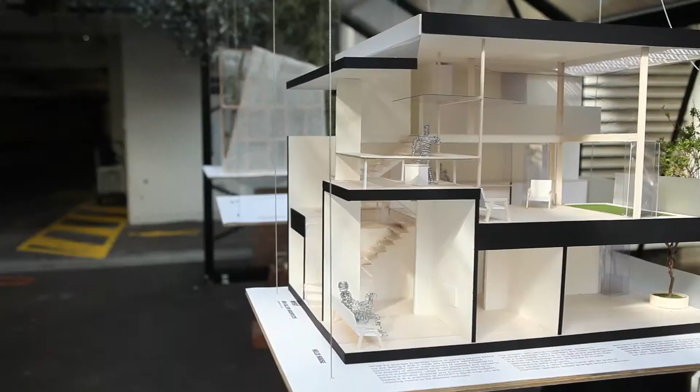It was interesting to hear the Edition Office guys saying how much they use models, because we unfortunately don't use them anywhere near as much as I'd like and don't get the chance to. So when the opportunity came here, I really jumped at the chance to get in there and spend a lot of time making a model myself and get these guys to do all the billable work for a couple of weeks, which was very handy.

First, I thought I'd start by talking about our clients in this brief, the family of four. Most of us here are somehow related to a family of four, whether we're from one, in one, or maybe one day we'll have one. Myself, I'm currently in a family of four. I've got two little girls, aged 4 and 7, Evie and Ruby, and all of the issues in this brief resonate with me. Even looking at our current clients, we've actually got 17 families of four that we've dealt with over the last 3 years.

So this is a really prominent clientele for us, and the issues they're dealing with is what we're engaging with all the time. What's been encouraging is the brief for the family of four has really developed in the last 10 years, and we're finding they're much more interested in sustainability. They want a compact house. They don't want the obese 240 square metre house we're seeing in much of Australia at the moment, which is the average Australian house size. We are finding people who want more compact, clever, adaptable flexibility in a house between 160, 180, maybe 200 square metres. That's really encouraging for us.

They're wanting to engage with the environment, to have sun, breezes, views to treetops and sky, wanting a naturally comfortable home. Most importantly, what we're finding is that they're all yearning for more connectedness with each other, and that's a huge part of sustainability from our point of view, the social sustainability and having houses that bring people together, not just about the physical. It's actually about creating relationships. So that's the key thing for us in this project, the connectedness.

So here we are on the site. Obviously it's a tiny footprint surrounded by tall buildings on 3 sides, but blessed with a sunny northerly orientation on one side. The main constraint is the size, 80 odd square metres, which requires people to be stacked vertically. The biggest problem I find with a vertical building is it separates people and distances them from each other. In light of the fact that our clients are telling us they want to be connected, that becomes the biggest challenge for us to address in this brief: how to have people vertical but still together.

So we propose the Helix house, where rather than having levels purely stacked upon each other in a tower format, we've got multiple split levels arranged in a spiral shape, where people can be in different spaces but still have a relationship with each other. Meanwhile, we're bringing the environment in amongst these people, the sun, the breezes, the sky, the landscape, so they're all immersed within their natural environment, living hopefully more in contact with a nature way of life.

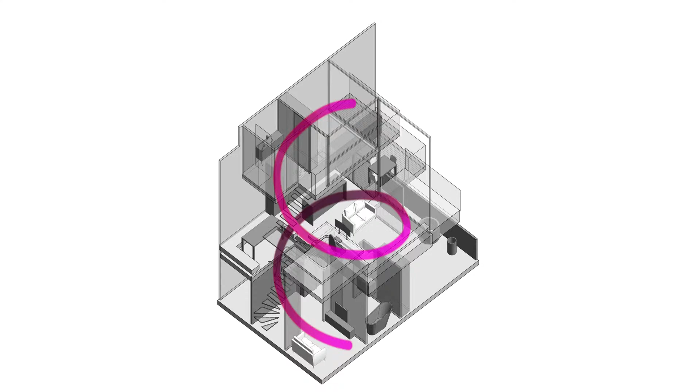So here we see the helical arrangement of spaces. Rather than bringing things in off the boundary and having a tall tower, we've pushed the walls to all the boundaries and kept it quite a squat shape. It's basically a cube, only about 7 or 8 metres high, pretty similar to what the width is. So one big volume and then separate levels helically arranged within that, borrowing from Raumplan concepts of flexible open spaces that all can flow into each other.

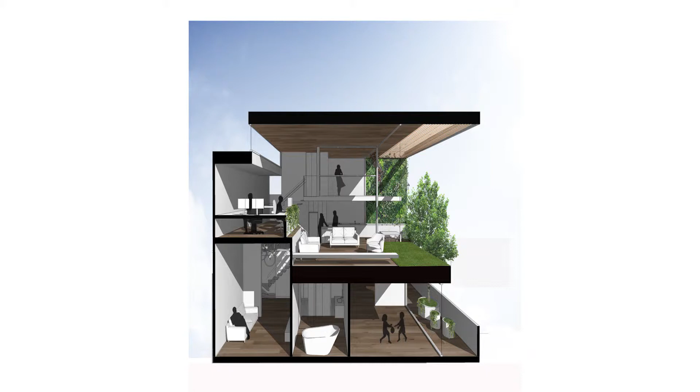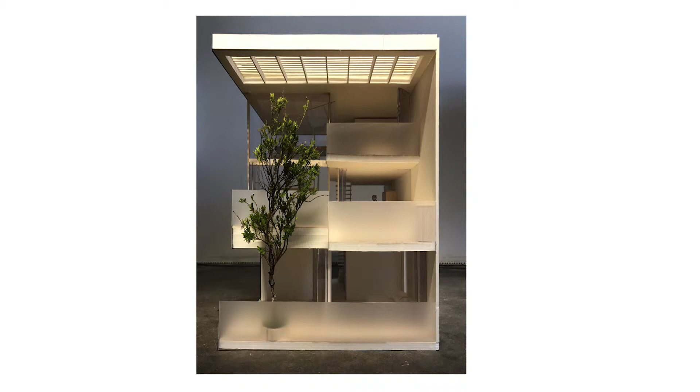And here we see it's all about bringing the light in from the north, having cascading terraces of garden over 4 levels on the north side, and then bringing that into the house and taking people out to the light. This is the north facade, with the 4 levels all pushed in and out to share light from up high down into the lower levels, with greenery growing up from below and flowing down from above.

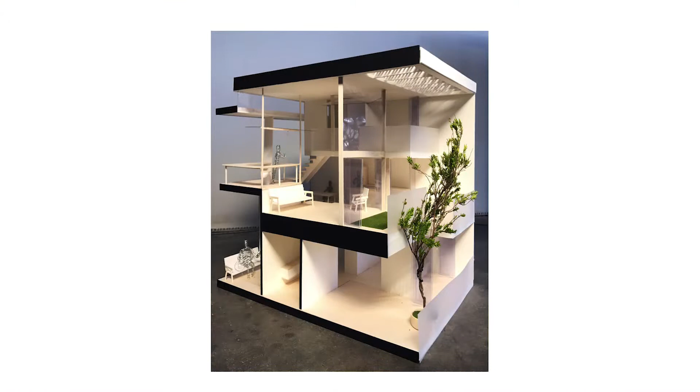I think it's obviously important to have some degree of privacy, with kids' bedrooms down the bottom, parents' bedrooms up the top, and the public spaces in the middle. But it's the rooms in between that we're really interested in with this concept—how do we deal with those, how do we arrange and detail them, so they don't necessarily have to be public or private.

With the kids' bedrooms at the front, we've got them very open and flexible with operable walls that allow them, when kids are little like mine currently are, to have 2 bedrooms but sleep in one and use the other as a playroom. Then as they get older, they can close them off and have privacy in 2 separate bedrooms as they need that privacy when they become teenagers.

Here we see the flexible room at the back, the one that can be multi-purpose. It's the TV room where kids can go and make noise. It's the music room where adults can go and make noise. It's the guest bedroom when people come from out of town and stay for a bit. It's open 99% of the time and has a visual connection with the rest of the house up through the central stair void, but can be closed off when you need it every now and then.

And then up above is that all-important study. We're finding the brief for the study is really evolving over the last 5 years, and it's a really interesting space at the moment because people's work habits and the working culture are shifting a lot.

People are working from home a lot. They're also having to work late hours. A lot of people are actually working internationally and having to do things late at night, not because they're catching up on work, but because they're dealing with other people overseas.

In the meantime, kids doing their homework—teenage kids in particular—what we're finding is our clients telling us that their schools are discouraging them from doing homework in the bedroom. They want the bedroom to be a place of relaxation, and to do homework in an open space, part of the family. And the on-flow effects of using the internet and social media mean parents do want to have an eye on their kids all the time.

So this study has really evolved from being not a room at the front of the house, not a study nook either, because that's not enough to service the 4 members of the family. They all need to be able to use it on occasion, and perhaps all at once. So it needs to be part of the house. This has been a really interesting one for me to deal with.

So it's still connected with everything else, raised above everything else, so you kind of feel like you've got a bit of disconnection. We're playing around with ideas of being able to close it off with a sort of cone of silence for when you do need to make that phone call late at night every now and then. It's a really interesting one for us to explore.